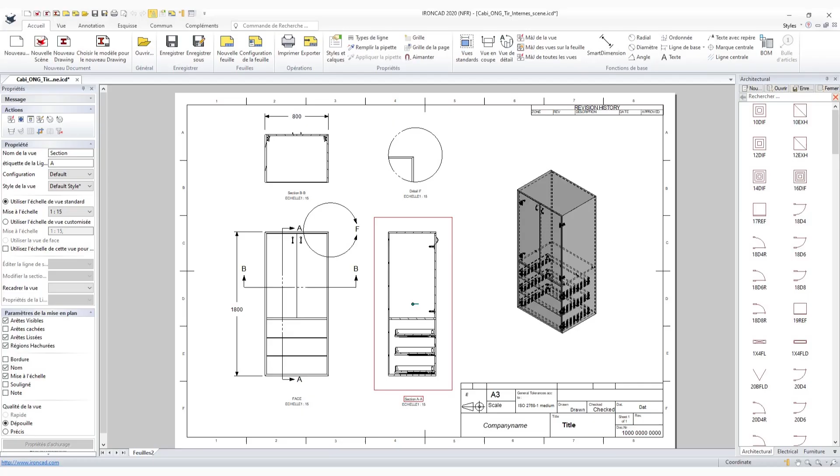Hello and welcome to this video dedicated to IronCAD's 2D drawing.

After completing your project and dropping the update features with a right click, save your scene. Now it's time to create a 2D drawing of the project. To create a new drawing, go to the Home tab.

Here there are two possibilities. The first allows you to create a drawing from a layout by clicking on New, then Drawing, and selecting the drawing layout in the dialog box that pops up. The second, by clicking on New Drawing, allows you to create a drawing based on the default drawing template.

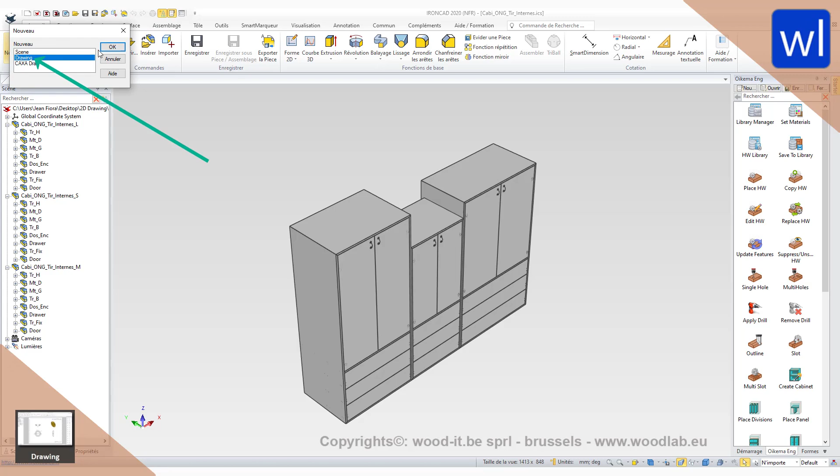For this example, I want to select the drawing layout. I click on New and then select Drawing. A window opens and I choose the tab I'm interested in, here ANSI Metric, and go look for the A3 layout. The drawing opens and a window for selecting standard views is displayed.

Here you will have to choose which views to place on the drawing. For this example, I select the views from face, top, left and HFG. Leave the automatic scale checked and then go with the green button.

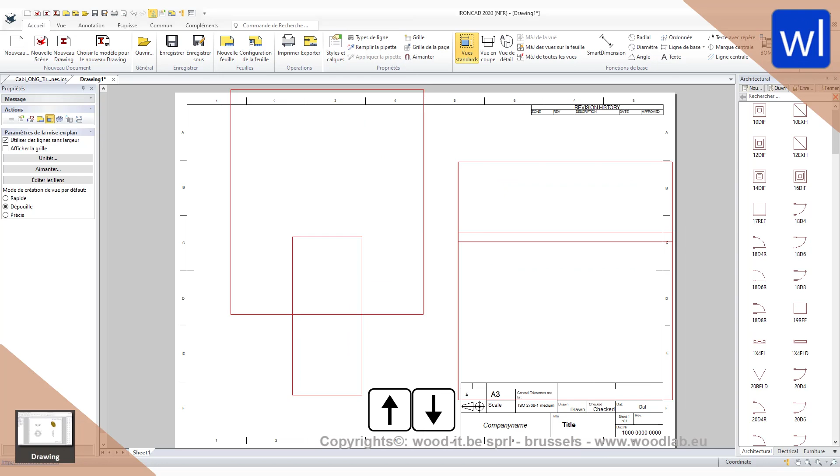Move the mouse to position the views, press the up and down arrow to increase or decrease the scale, then click to validate the placement.

Then select the face, top and left views. On the left, in the properties, check name and scale. You can also access other properties by right-clicking on the view and selecting properties.

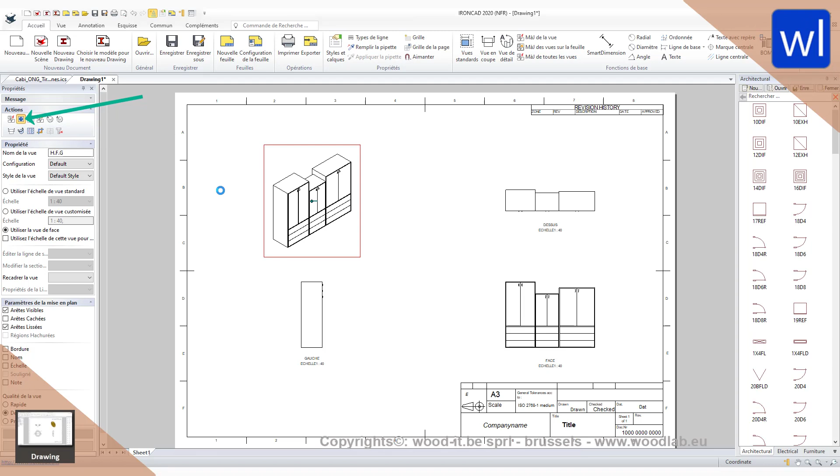Then click on the HFG view. On the top left, in the properties, you can, for example, apply a shaded rendering. Select the top view and check hidden edges in the properties.

To add dimensions, click Smart Dimension. You will then be able to select a curve to place a dimension. Smart Dimension also works point to point. To toggle between direct dimension, horizontal or vertical dimension, press the Tab key.

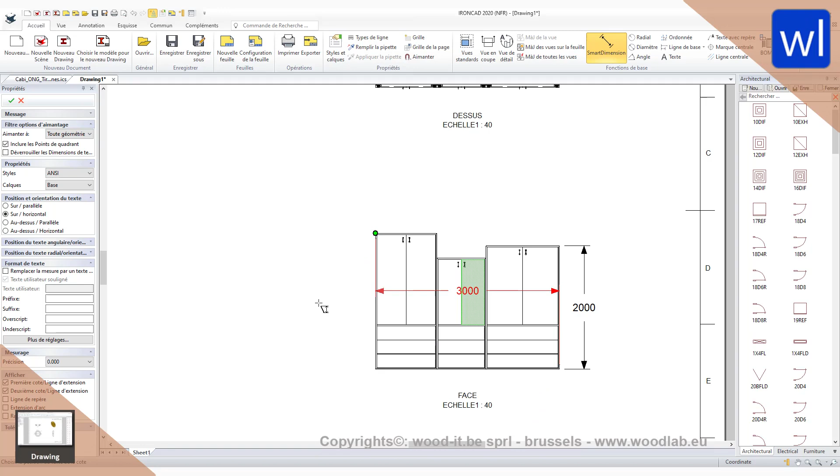Avoid overloading a drawing and prefer adding a sheet to the drawing to add new views. Go to the Home tab, click on New Sheet, then select the drawing layout here, ANSI Metric A3. Then click on Standard View.

On this sheet, I want to detail only the left cabinet. I check the box to select the part assembly to be projected. A window opens on the left, and I select the cabinet to display from the list, then click Apply. On the right in the preview, the selected part assembly is displayed.

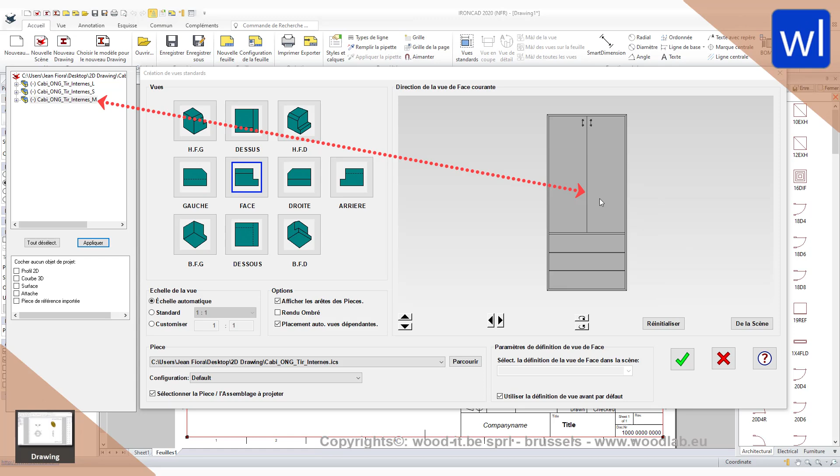Select Face View, then Validate. Position the view, then click to place it.

I now want to create a sectional view of the cabinet. To do so, click on Sectional View, choose the orientation, here Vertical. Place the cut on the cabinet, select the direction and its name, and validate. Position the view, then click.

Let's go to the Detail View. To create a detail view, for example of the cabinet assembly, click Detail View. Select the central point of the detail view, then enlarge the circle, which represents the area to be detailed. Click to confirm the view, position it, and click.

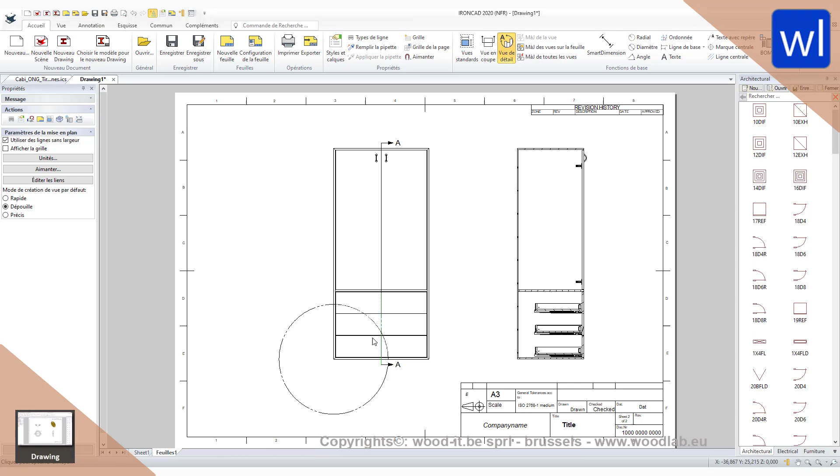Then go to the Annotations tab. Here you will find the different elements that can be placed on the drawing. Add essential information to the project with text or annotations with markers.

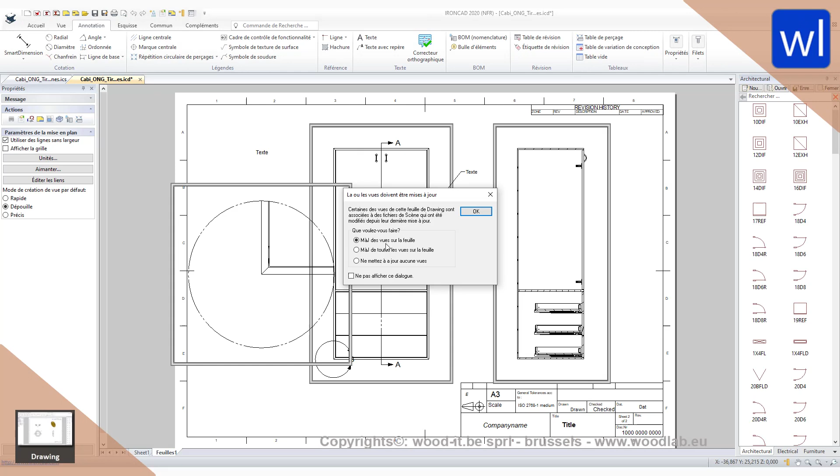Once finished, save the drawing. Go back to the scene and modify the dimensions of the left cabinet. Go back to the drawing, a window pops up, click OK to update the views.

You will notice that the dimensions have changed. The drawing has followed your changes. It is therefore dynamic, and yes, it updates automatically.